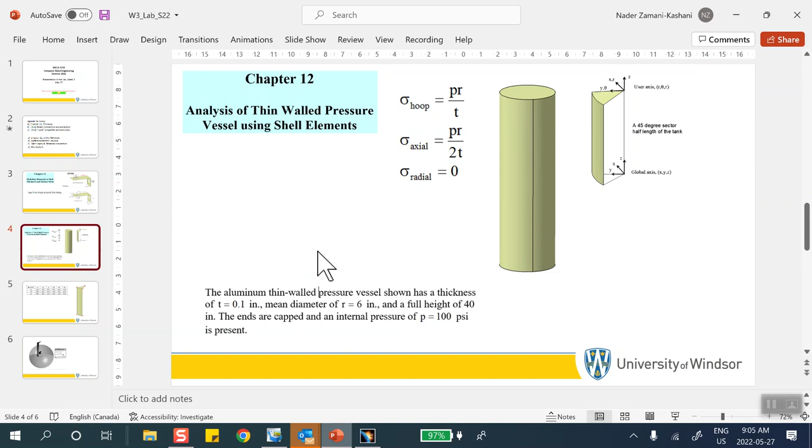Let me see now. I don't want to concentrate on these dimensions, so I'm going to make my own dimensions, so that I don't have to worry about this. All right, so let's go ahead to Catia. Those of you who are watching this recording, I'm ignoring dimensions.

What? What happened?

Okay. Let's start with solid first. Okay, I'm going to start with solid. So on that face, I will sketch. You know what? On purpose, I'm going to create a whole solid and then make a plane and cut it. Okay? So let's do that.

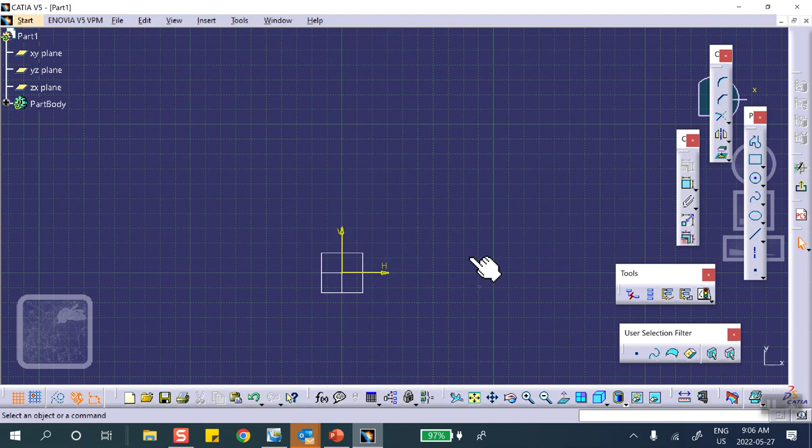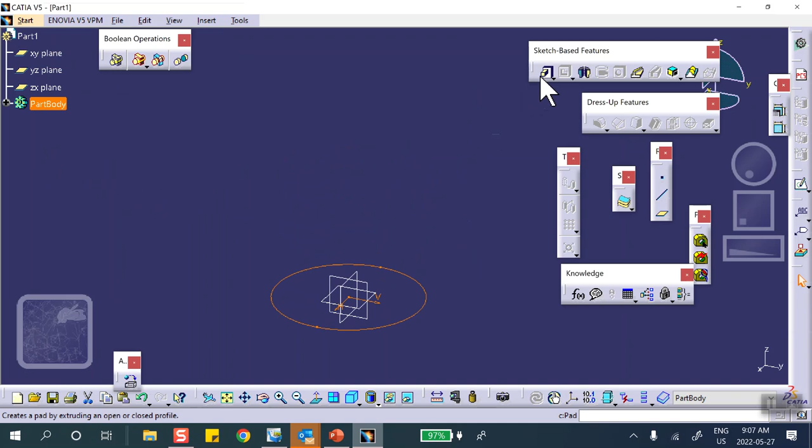You can say, can I not make that sector to begin with? Yes, you can. But I'm doing it differently. So obviously here I'm going to go to part design because I want to make a solid object out of that. Okay, so let's say this is half the height.

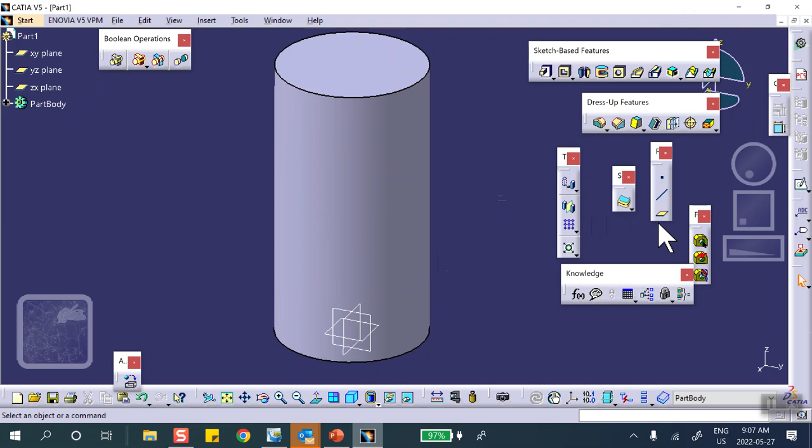Now, I would like to cut this thing, take a 30-degree sector. Okay? So I have to create a plane that is 30-degree rotated, for example, with respect to one of the vertical planes. Here's how I'm going to do that. Look, if you know, great, I have no problem. Plane, but let's see. What is one of these?

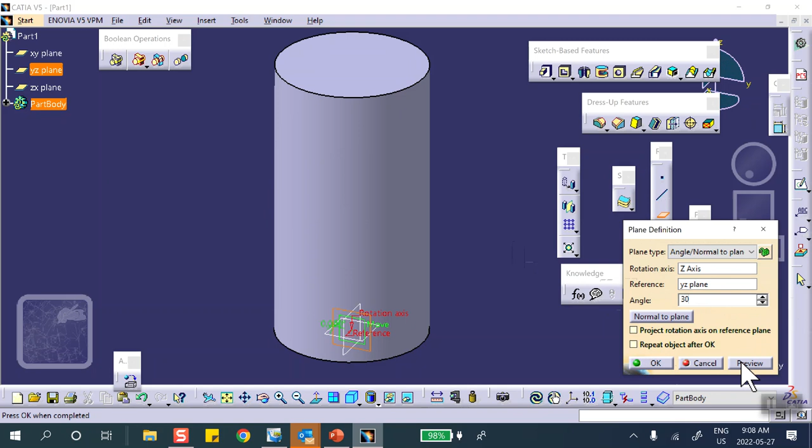It says offset, angle. Something with angle. Okay, so it says what is the rotation axis? I'll say Z axis. What is the reference? So for example, YZ plane. And I'm going to put 30 degrees here. So you can see that it actually created a plane at 30 degrees to that. And I'm going to use that for cutting purposes later on.

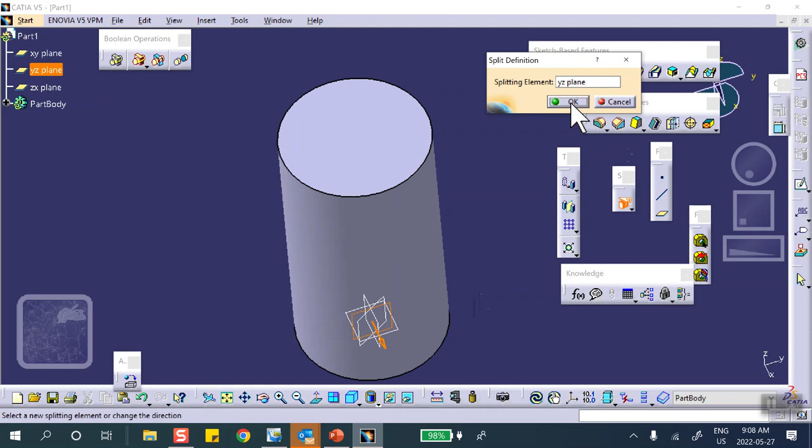See this? Okay, now get the split. Let's first cut it with respect to YZ and keep the other side. Let me flip that. It really doesn't matter. And then I'm going to cut it with that inclined plane. Okay, so another split. Read it carefully with respect to that inclined plane and keep the other side. Flip it.

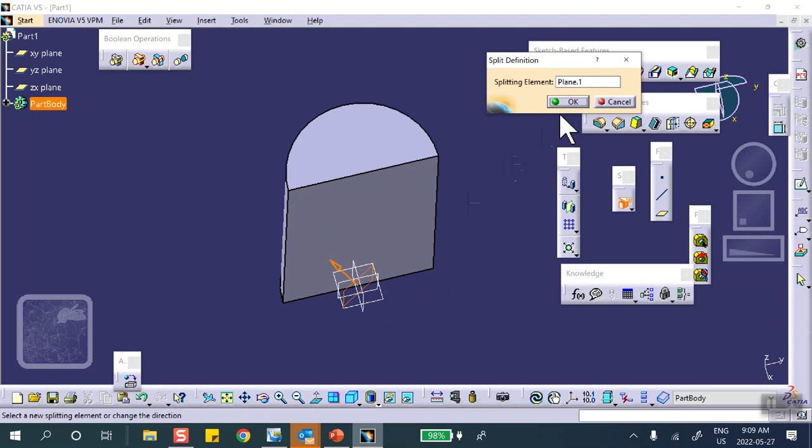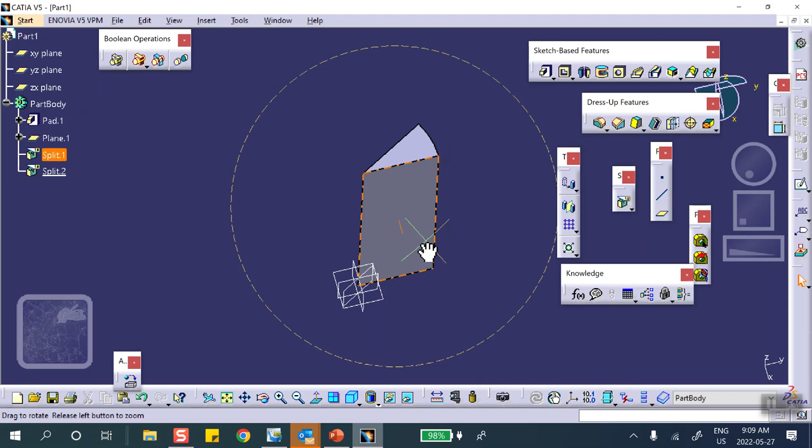Obviously, that was not what I wanted. That's okay, no problem. Double click on it, flip the direction of the arrow, and do this thing any way you want. Okay, I just wanted to show you how you create planes with certain orientation. Okay, so this is it. Let's apply material to that. Material, metal. Okay?

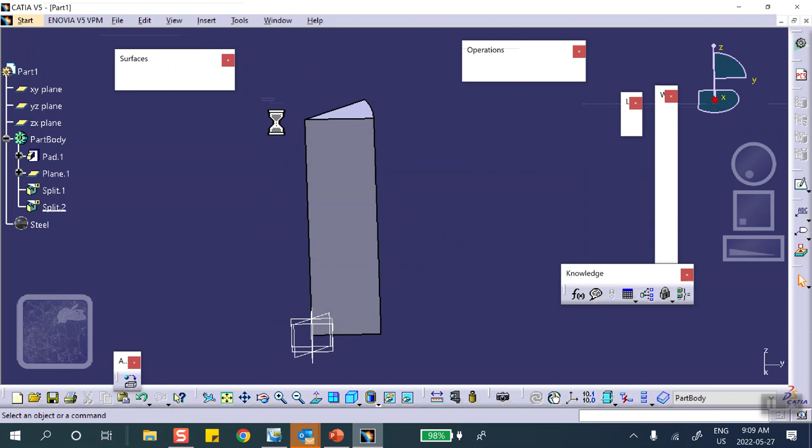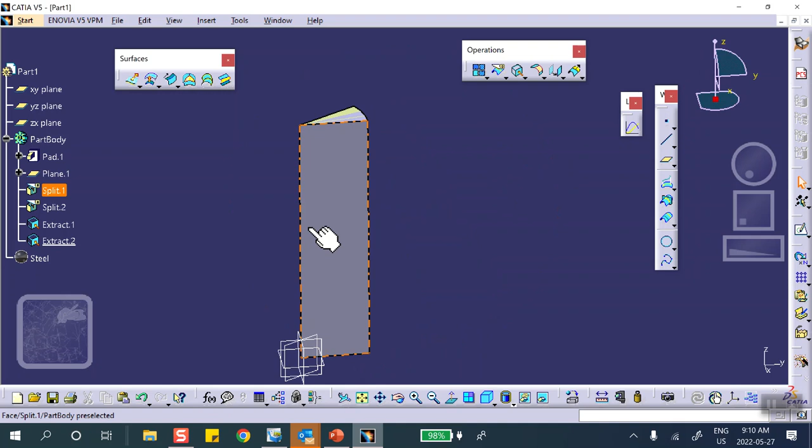And we go to generative shape design to extract the faces. Extract the top face and the side face. Oh, notice that it won't do it. I have to do it separately. No problem. Do it again. There. And we don't want this. We hide it. We cannot delete it because these surfaces are coming from that object. We cannot delete them.

Those surfaces keep the same material that you apply? Yes, yes. Because once you put it on the part, anything that's in there, the surfaces are in this part. Okay? Of course, look. Part steel is down here. Everything that's here is in that part. And the part is taking the steel properties. I'm sorry, say that again? Half the height. I already assume that this is half the height of the thing.

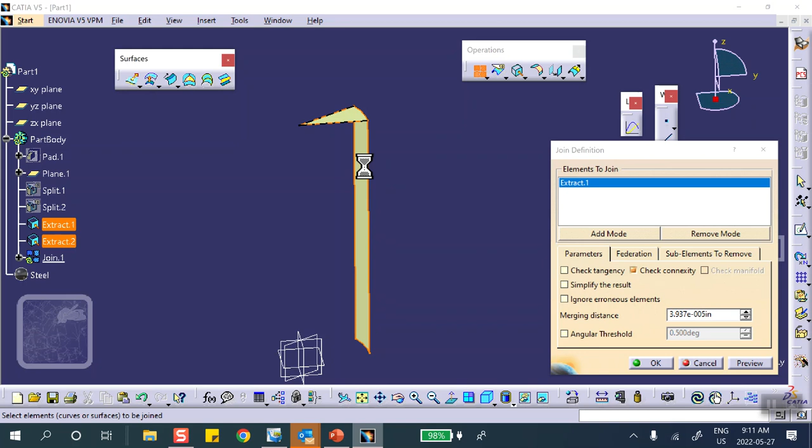Okay. Now, because I don't want this issue of connections, why don't I join them? Join this to that, so that we don't have that issue of seams. Now, because later on I want to apply a certain restraint on these edges, there is no problem because these two edges happen to sit in the YZ plane. The other two edges are not in the YZ or XZ or XY plane. So I have to create an axis system for that. And let me remind you how we do it.

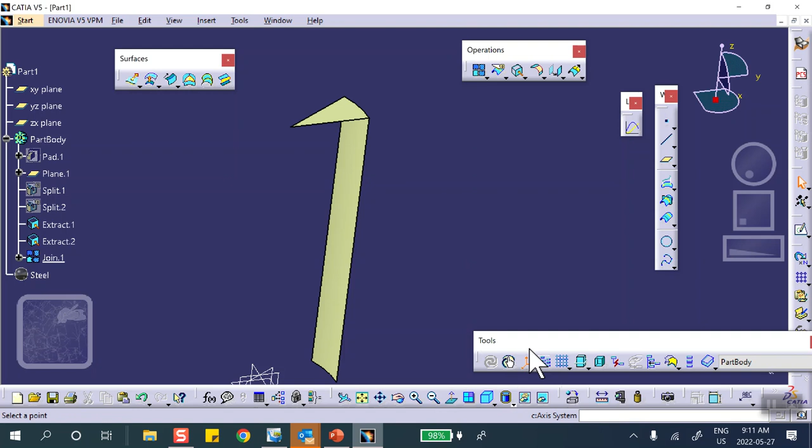That thing is right here at the very bottom. There's no way you can miss it. Axis system. When you ask for the coordinate system, automatically it creates it at the global origin, right there, and oriented with the global coordinate system. I don't want that. It makes it easier for me to see things. For the origin, I'm going to select this top one. Oh, actually, that one. Let me undo this. You know what?

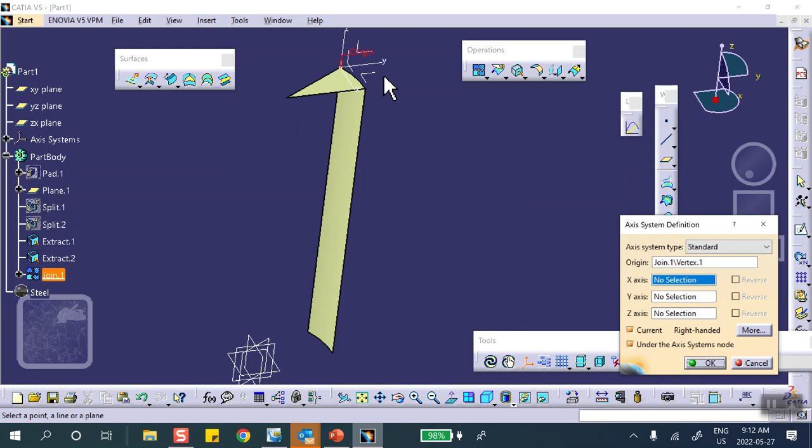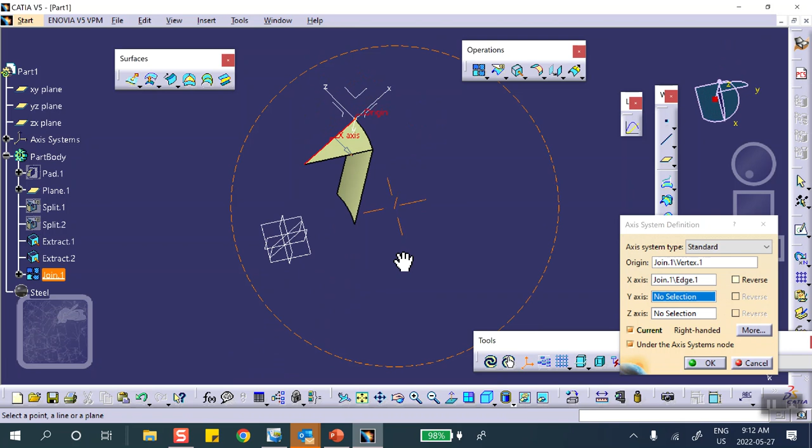I want to put it on that corner, which is not aligned with the edge that I cut. But I have a choice of putting any of these coordinates in the direction that I want. For example, if I want x along this line, no problem. I say here, x, put the x there. Rotate it so that x is there. You see, x is along that line, the x of this coordinate system. Okay? You say fine.

Let's go and do the rest of the problem. I have a question for you: would you like me to go to the advanced meshing tool or generative structural analysis? Okay, no problem, because it's so easy.

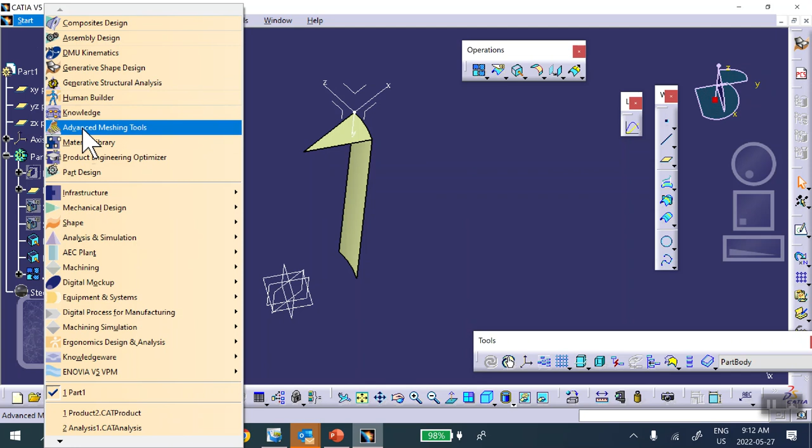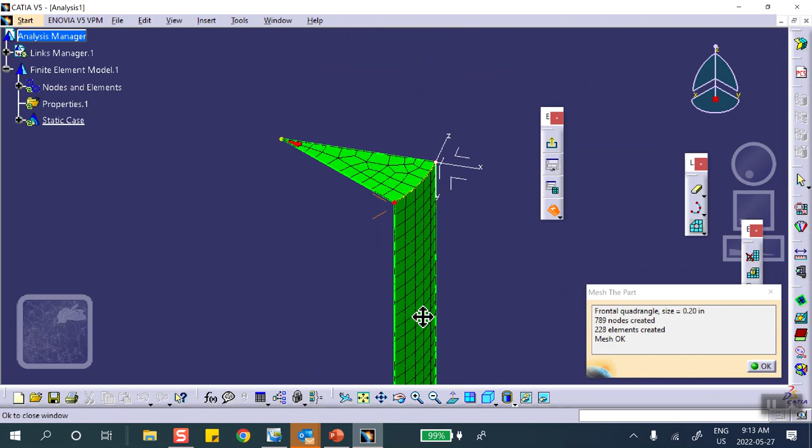Click on the surface mesher. Select the entire thing, and put a reasonable size there. If not, you can change it. Say okay, and zap it. You like that? Okay, say okay, and then we exit that particular surface mesher module. The rest is the same.

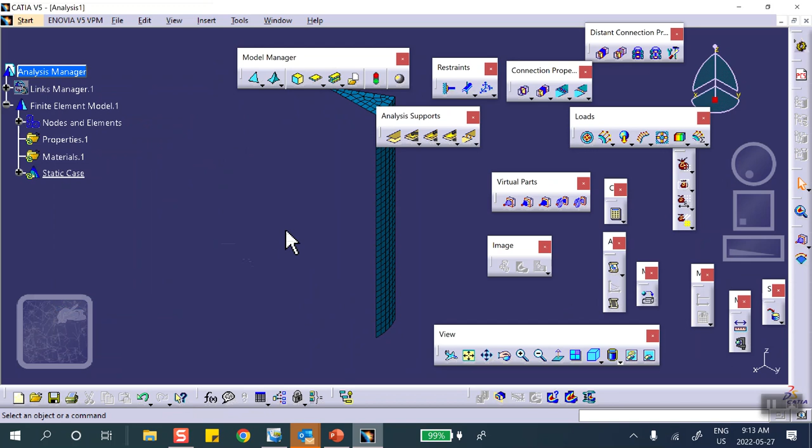So we're going to go to the generative structural analysis. Already we meshed it. If you want to see the mesh, right-click mesh visualization. It's right there. Okay, we can see that. Deactivate it.

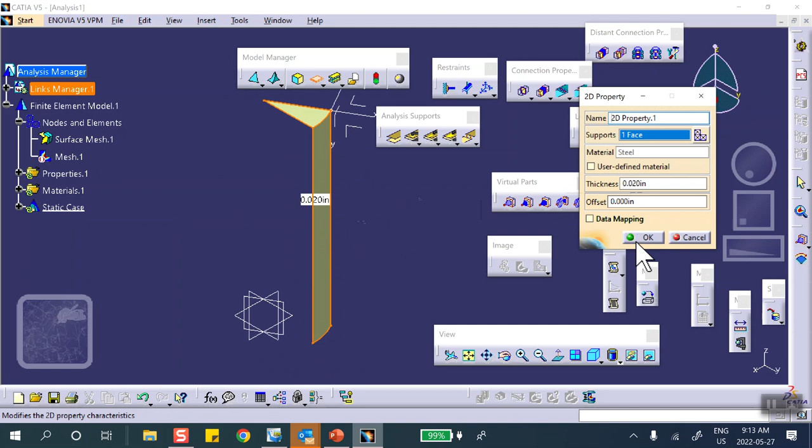Okay, now let's see, thickness on that face, whatever it is, 0.02, 0.2, whatever. Just remember that these formulas I wrote down for you are valid for thin wall pressure vessels. So if you want to check against those formulas, this better be small thickness. In principle, you can make it a million miles and it'll do it for you, but it's garbage, basically. So all I'm saying is that we go ahead and recklessly do this thing.

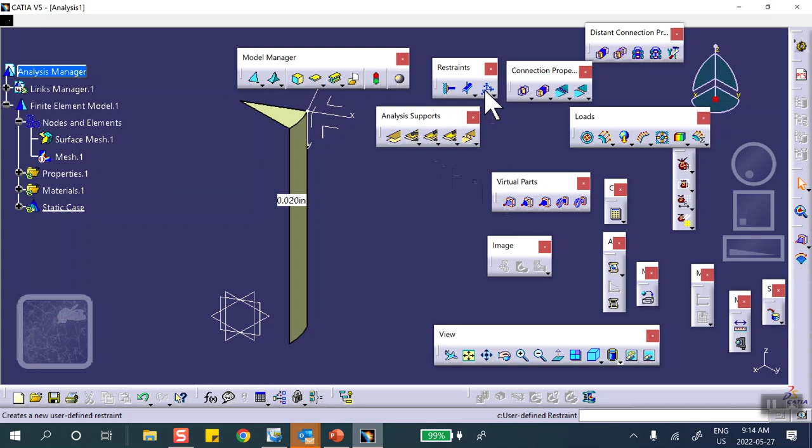Okay, so let's go ahead and apply our restraint. This is user-defined restraint. This edge and that edge lie in the global YZ plane. You can see that, global YZ plane. They do not move in X. Rotations exactly the opposite. Those two other edges lie in this coordinate system conveniently.

So let's select the other two edges. I'm going to uncheck these. This edge and that edge lie not in the global, but in the user coordinate system I created. So the coordinate system that you use is with respect to this coordinate system you see created.

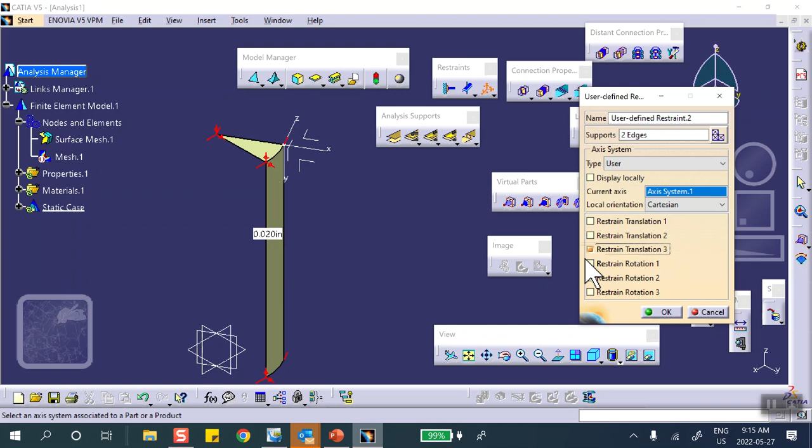And can you help me with that? What do I fix translation-wise? What do I fix? Z, good, good. Direction 3 and rotation, exactly the opposite. So this and that, and okay.

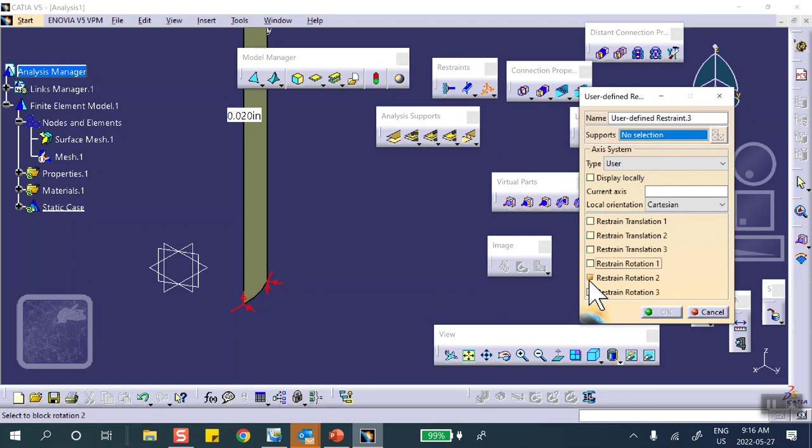It's a symmetry, with respect to, be careful here, with respect to the global one. For example, it is in the XY plane. You could have used the other one, but I changed it to global. I switched it from user to global. It's in the XY plane, does not move in Z. Rotations is exactly the opposite. Okay?

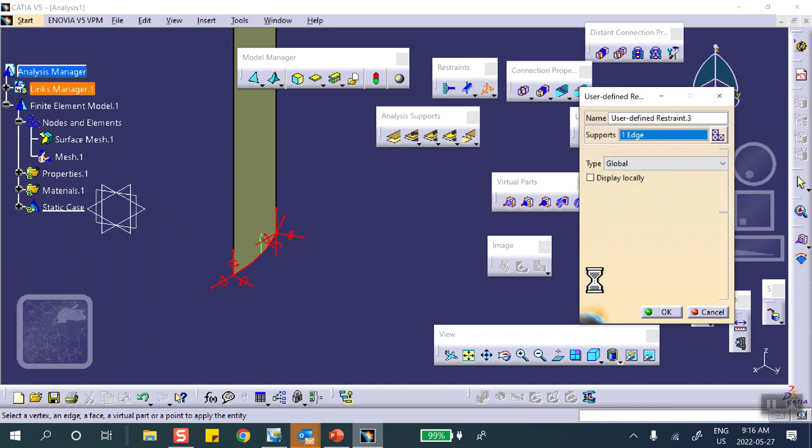Last thing, pressure, load. I don't know what I have, 100 psi. So we're going to apply pressure.

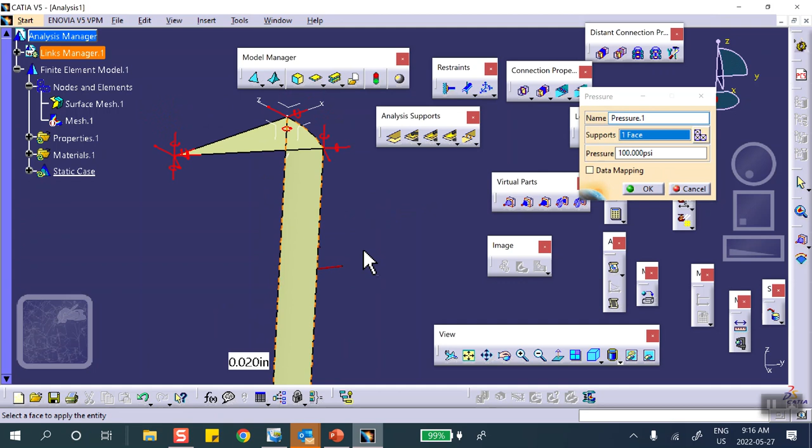Now, I'm pretty sure that you're going to have to select both of them. In spite of the fact you joined it, you have to put it on this. You see this? That's suction, of course. You put a minus there, right? That pushes it in. Okay, minus.

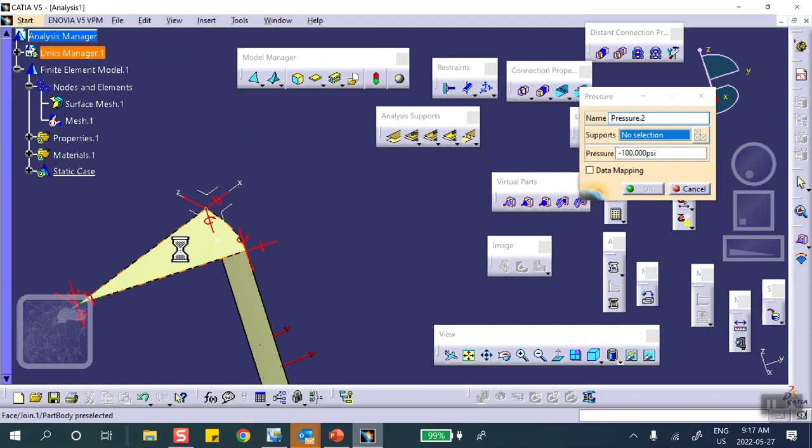You're going to have to do this thing separately. So on the other one, and that's correct. You can see that's outward.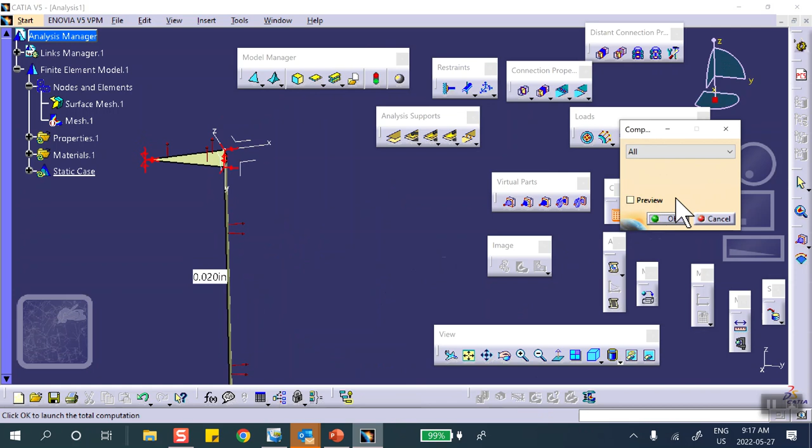Okay, always pray. These are not too bad, but they're safe. I'm not going to even save it. I'm going to run it. Done.

Look at the transformation. That doesn't surprise you, because the piece of this entire structure that's most flexible is on the top and the bottom. Trying to expand the periphery is going to be harder. Okay, but these two bulge out.

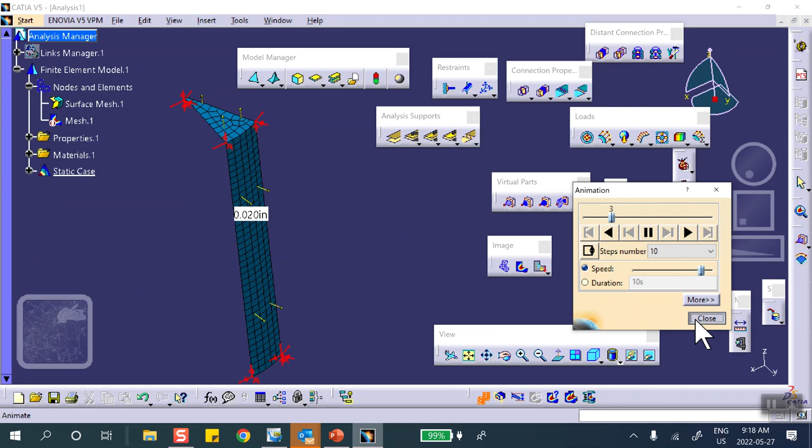Okay, if you look at the von Mises stress, you're going to do some detailed work here. It tells you that in this particular problem, the biggest stress is around the seam up there, and I agree. If it fails, in all likelihood, it's going to be at those welds. But do not take these numbers for granted, because the critical area, one critical area, is on the top, I understand, but to get good stress distribution with shell elements on that top is not going to be possible. Okay? It gives you a rough idea, but it's not possible.

Generally speaking, when you do this kind of thing, unless you're designing these for the weld and things like that, you're interested mostly in the hoop stress and things like that. Okay?

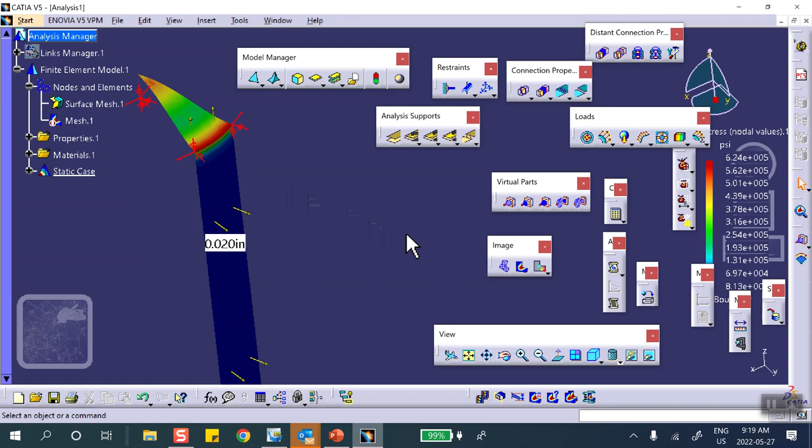So be careful of taking these for granted. Now let me show you something.

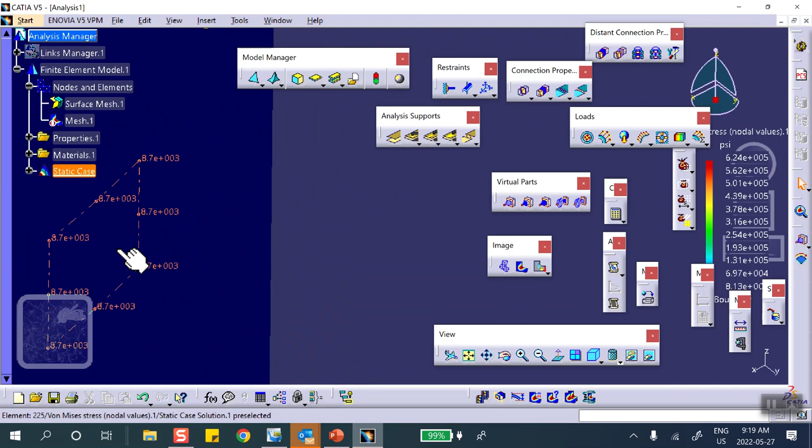If I want the stresses here, look, as I go down, they're all the same color. If you put the cursor on it, the numbers are also all the same. Let me zoom in for you. As you get closer to the top, things will change, but in that area, in that vicinity, everything is blue. Everything is essentially PR over T and PR over 2T dumped into the formula for von Mises stress.

But if you plot the principal stresses, it will actually give you PR over T and PR over 2T. Because of the principal stresses, one of them is the hoop, the other one is the axial, and the third one is zero. So if you go and plot the principal stresses, which was totally useless for beams,

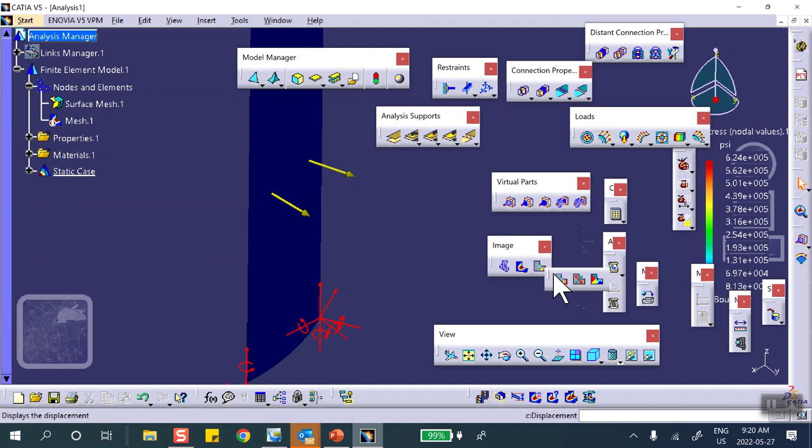here you can actually get things that you did with Dr. Green and whoever taught you in the first course. Principal stresses, and in fact, these values are PR over T and PR over 2T. If you zoomed in closely, you see one of them is double the other one. The hoop stress is double the other one. You multiply 5 by 2, you get 10.

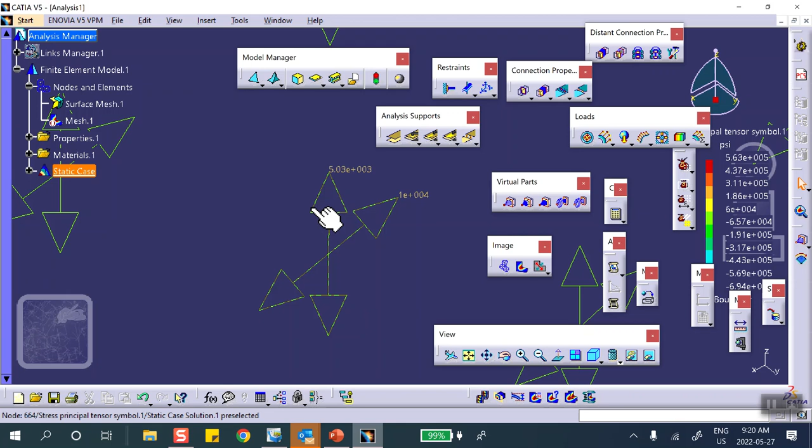Okay, now one other thing I want to show you. You might say, this is fine. Let me actually put this thing back where it was. Average ISO right there, nothing exciting.

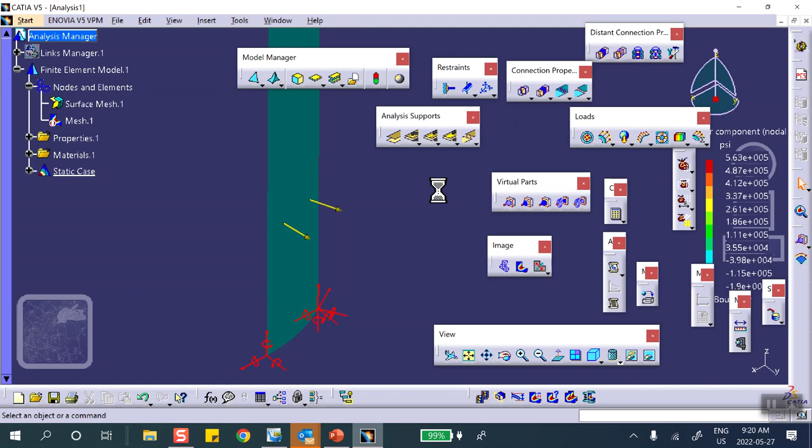Now, which stress is this? Principal stress. But if you want to know which one you're plotting right now, let me go there. Under more, you can say which one you want, C11 or C22. If I change this, it's going to be half the values.

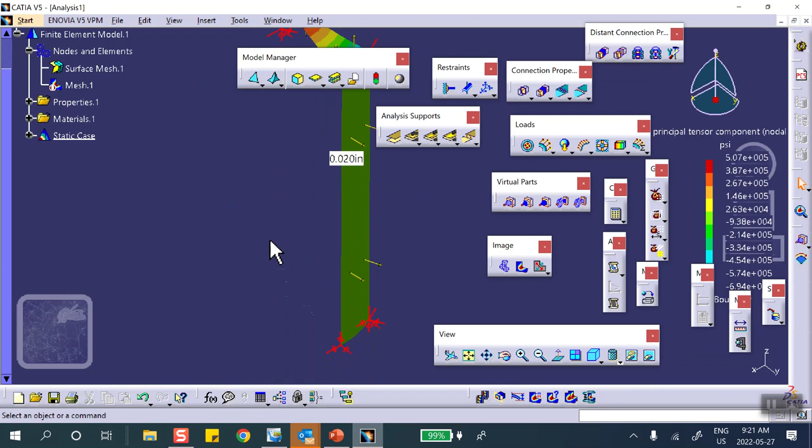But my point is something else. Sometimes you get the von Mises stress, for example, or any of these, and you want to stay away from that top because you know that that top could be garbage. You want to stay away from that, and only show the stuff, for example, here.

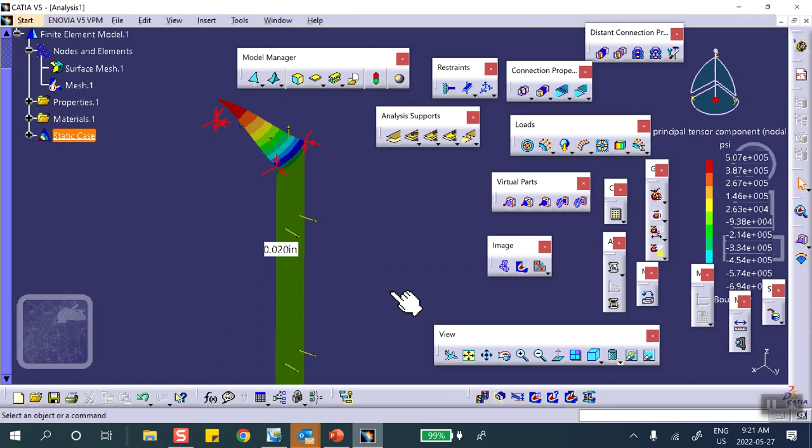So what you do is go and create - let me deactivate this block first. No, okay, we can leave it. You go and create a group. Catia calls it group, and there are different ways of making it. For example, I can make a box group.

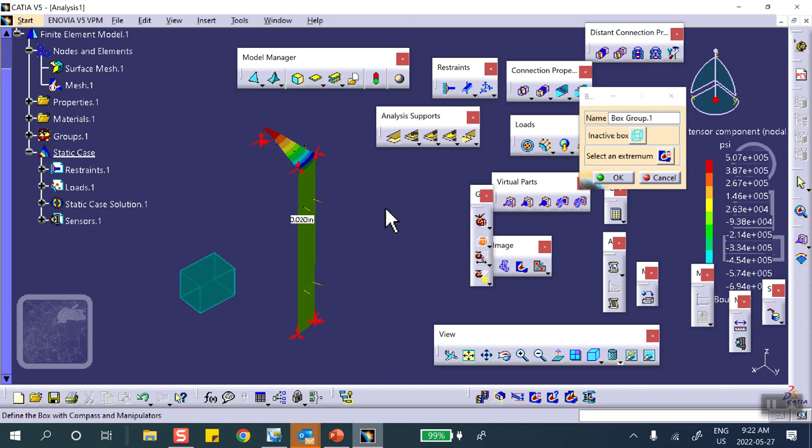It asks, where do you want this box to be placed? Well, I don't want it to be placed there, so I'm going to move it. Let me see, does it cover that? If not, I resize it so that it actually covers it.

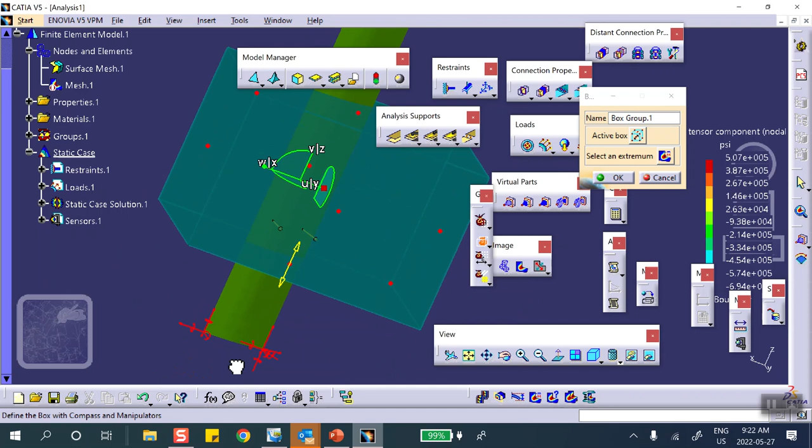Sure, okay, there. Just show me the stuff in that box. No problem. Let me hide the box first. You go to the place where you decide what you want. You say, just show me the box group, don't show me any other garbage.

What is the range? What are the numbers? They're all the same, but for plotting purposes, it has to do something. Just be careful - colors don't mean ignore the numbers. Those numbers are all the same.

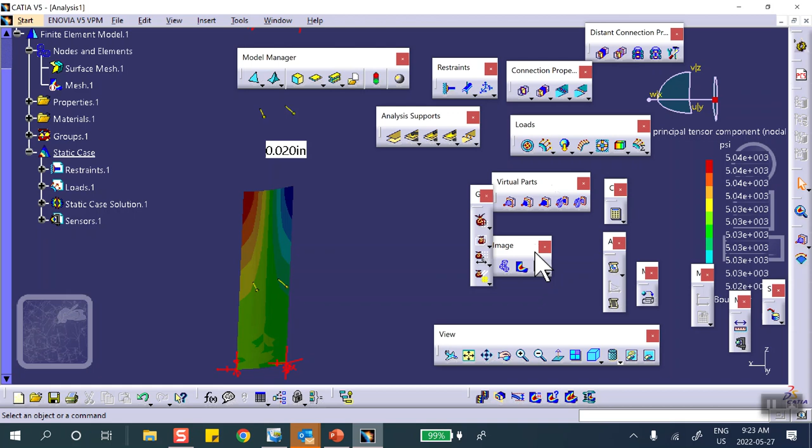Okay, listen, I am not going to do this thing the third way. Let me just show you. I'm not going to finish the problem, but I want to show you how to create this geometry in 20 seconds.

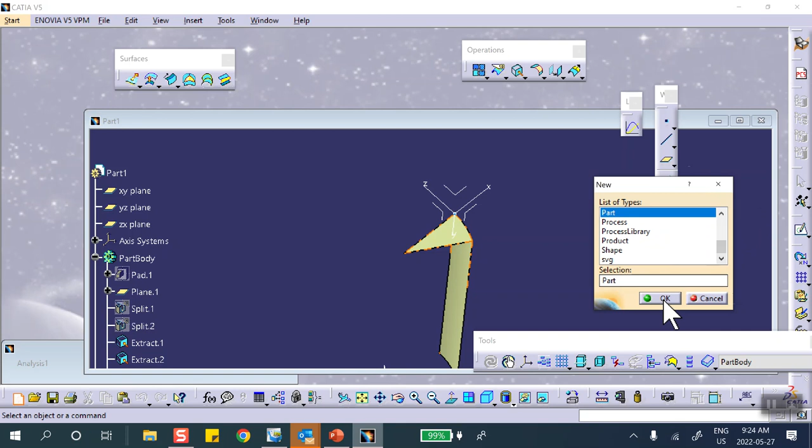Let's start with the part. Okay, 20 seconds, it's not going to take more than 20 seconds, I can guarantee you that. On that plane, I will sketch an L. Exit,

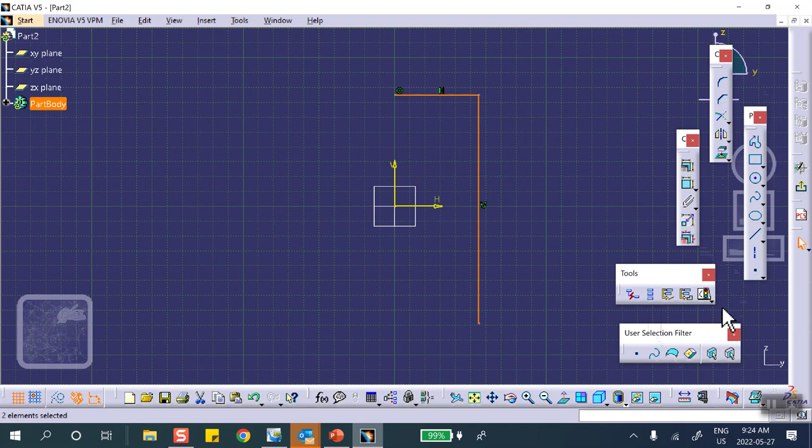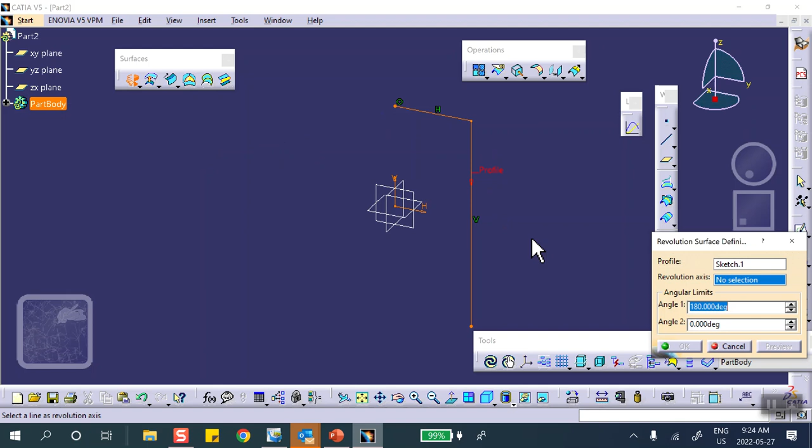and revolve it. Catia does not call this thing shaft - in generative shape design, it calls it revolve. These are different ways of making surfaces. We have already done extrude, and there's one here which says revolve. So it says revolve this about the z-axis. By how many degrees do you want? Let's say 30 degrees.

You don't have to join these, just like when I extruded, I got a single surface. You just revolve it - the rest of the problem is exactly the same. So let me stop this recording first, and then I talk about